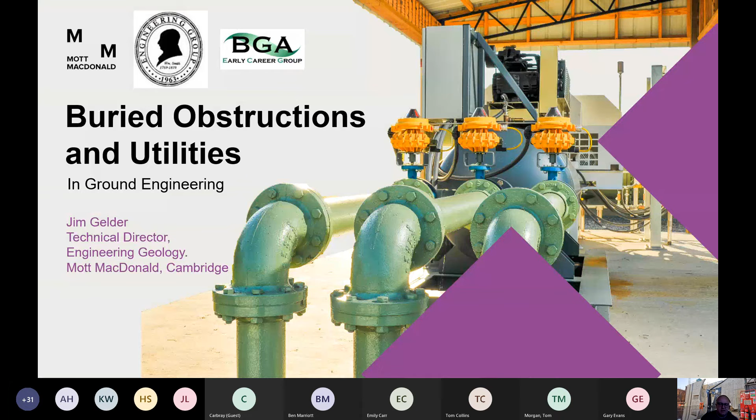Gary's already mentioned the Menti. It's really two questions. I would like you to think about the hazards associated with buried obstructions in the ground and the hazards associated with buried utilities. And there's one question around hazards and another question around mitigations.

I'm going to give a bit of context. I'm going to go through three case histories that will hopefully inspire and trigger thoughts in your brain around hazards and mitigations. But I don't believe I've got an exhaustive list, so I'm relying on a tremendous amount of insight from everybody on the call.

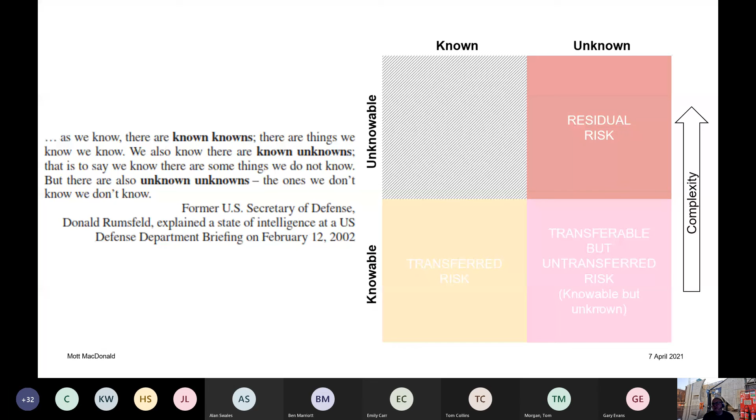The pink box is a box I'm quite passionate about, insofar as things that are knowable but unknown. The more effort you can put into moving things from that pink box to the yellow one, by investigation, by really tenacious literature search and searching for records, the better for everybody. The earlier you can develop as complete a picture as possible of what might be buried in the ground, whether it's demolished buildings, services, or whatever, the better for the project. And that's a real passion of mine.

So a quick look at what the Eurocode says. As with most things in the Eurocode, it says everything and nothing. Doesn't refer to buried obstructions or services specifically, but in planning the design investigation, it says that we should provide enough information for adequate design of the temporary works. And so if you've got to manage during construction with buried obstructions, buried foundations or whatever, then that fairly squarely falls into that category. We've got to provide the information required to plan the method of construction.

Same story, and we've got to be able to identify any difficulties that may arise during construction. All three of those squarely pointing towards our duty of care to have properly investigated and defined, as far as reasonably possible, things that are buried in the ground that aren't readily identifiable - known unknowns and unknowable unknowns. Design investigation shall identify in a reliable way the disposition and properties of all ground relevant to or affected by the proposed construction.

Imagine working in a water treatment works where there's a buried tank in the ground, an old partially demolished tank, and part of your new structure is going to be on it, part of it isn't. You really need to know as early as possible where it is so that you can design around it.

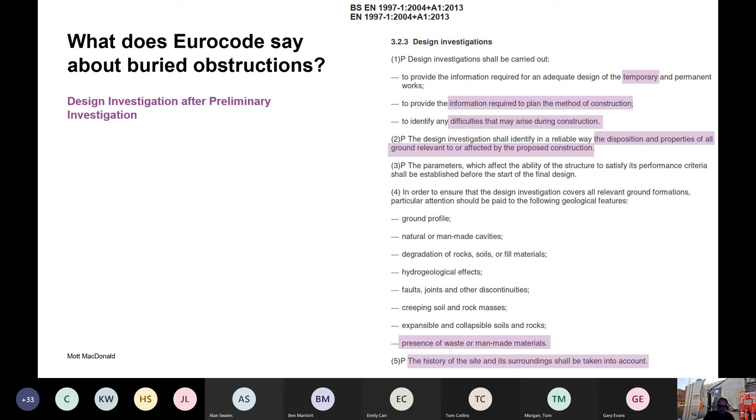It's always complex, but hopefully you'll get some clarity on some approaches we can take. For any site, as early as possible, you should consider the complexity and the amount of experience or precedent you've got for any aspect of the project - specifically, the complexity and precedent of the engineering, the complexity and precedent of working in a specific geology, and for buried obstructions, the complexity and experience precedent of working in the Anthropocene, that is man-made problems.

So the 3 case histories: 2 from Boston, 1 on the left bank of the quay, and I'll show you that in a second, 1 on the control room, and 1 from a waste water treatment works. For the left bank, our natural geology is relatively benign.

For a sheet pile wall, it's glacial till, for which there's plenty of experience and precedent as well. So down here, our geology is relatively benign, but we're interacting a new quay wall with an existing quay wall. That means the engineering is very complex.

And when I go through the site history, you'll see that the Anthropocene is also very complex in this red box. Really, we need to be doing as much as we can as early as possible in the project to allow the design concepts to fit around the dragons and monsters that may well be in the ground.

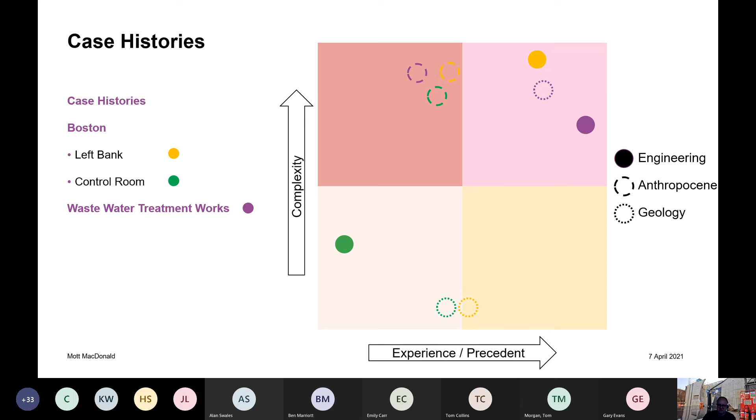This kind of classification I find really helpful to have discussions with peers, our design teams, contractors and early contractor involvement, and discussions with clients, to make sure that everybody's in the right space for how nasty it might get when you start digging holes where there's stuff that we don't really want to be there.

So back to the Eurocode. The definitions of the 3 geotechnical categories are helpful, but not exhaustive. They don't really deal with buried obstructions in any explicit way, and so those matrices that I've just presented, I think, are really helpful.

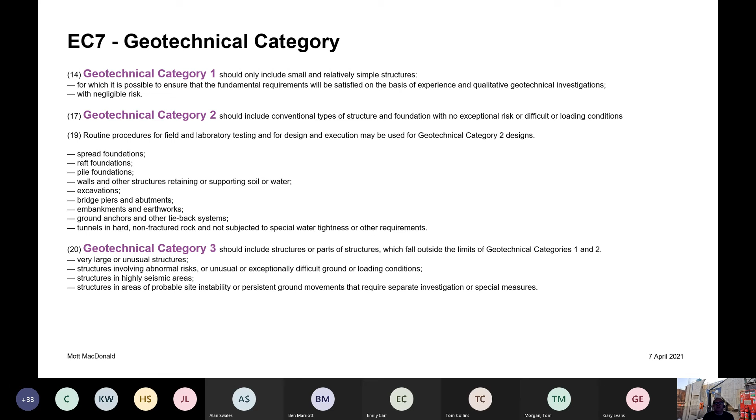You're never going to be in geotechnical category 1 if you've got congested utilities or buried obstructions. You will probably be in geotechnical category 2, but in certain circumstances you may involve abnormal risks, exceptionally or unusually difficult ground conditions, probable instability. So there are instances where I think buried obstructions could carry you into category 3, but the majority of the time you'll be in category 2.

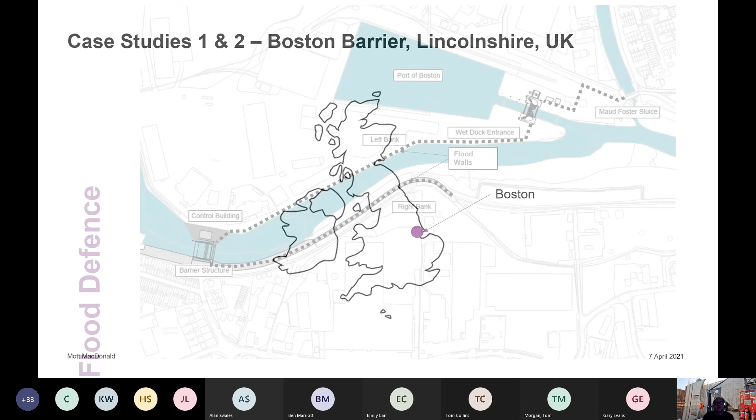Okay, so on to the case histories. Case histories 1 and 2, Boston. There's Boston in Lincolnshire on the Wash. A GA of the project - it's a flood defence scheme, so there's flood walls, new flood walls, sheet pile flood walls along the right bank of the river.

A new barrier structure - an enormous structure, a 365-ton steel gate operated by 2 55-ton hydraulic rams. Then a new flood wall along the left bank, all of which is in the estate of the Port of Boston, which is well over 100 years old and has a checkered history in its development. Another set of gates and a new entrance into the port, and flood walls seal into an existing flood defence at Maud Foster Sluice.

The geology is relatively benign in the natural ground. We've got glacial till and alluvium shown in yellow and green. The grey is made ground, typically 5 to 10 meters thick, very heterogeneous, locally contaminated, and as you'll see, made up of stacks of material from the historical development of the port.

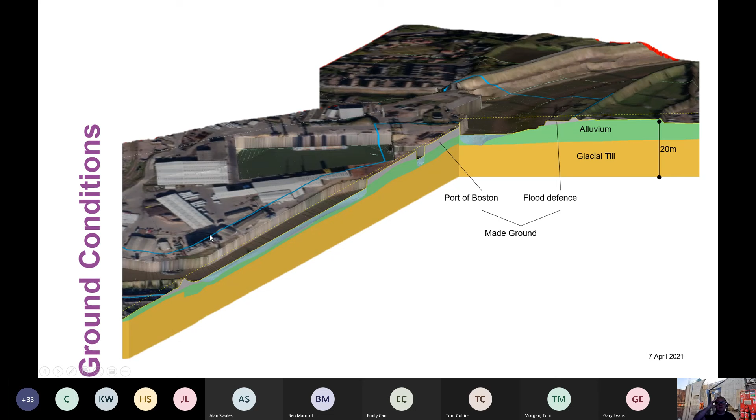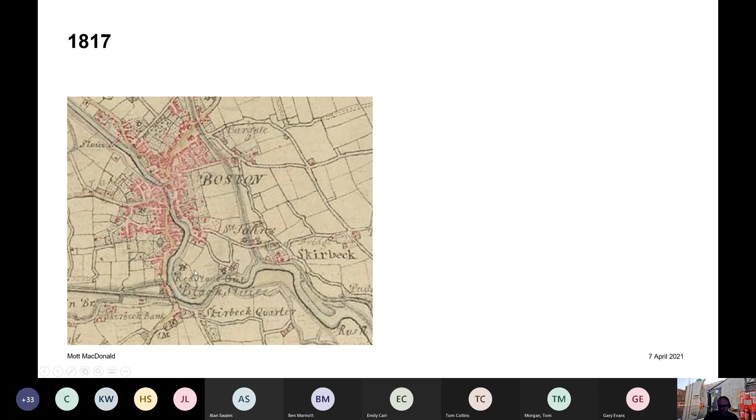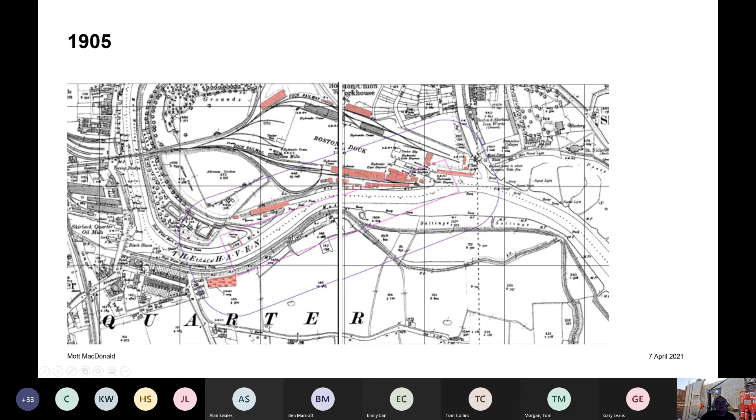By 1905, most of those buildings have either been developed further or demolished and replaced. There's a new ship slipway coming down. Those are the main developments by 1905.

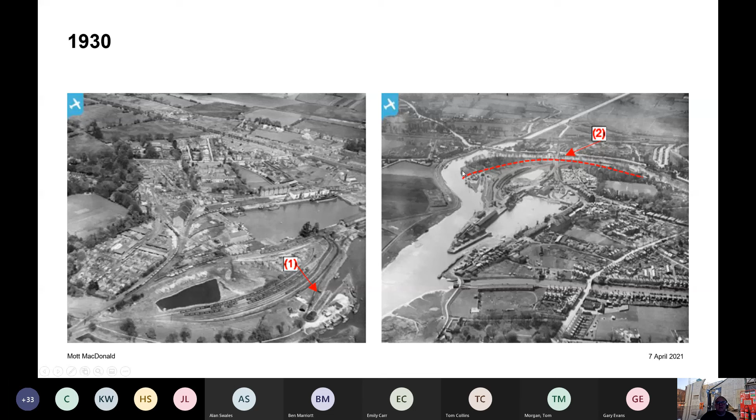Aerial photographs from 1930 show the slipway from the other side, and the dock and the railway. Our new wall is in this area here along the riverbank.

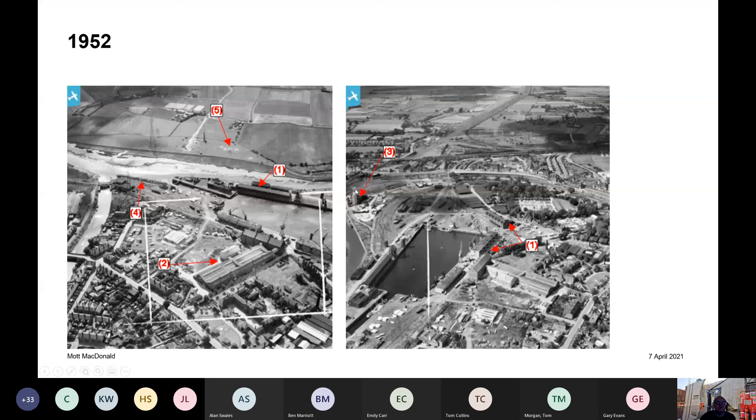By 1952, the left bank has been formalised with a concrete sheet pile quay wall, and this big sugar and grain silo has been constructed at that end. Things are getting really quite complicated.

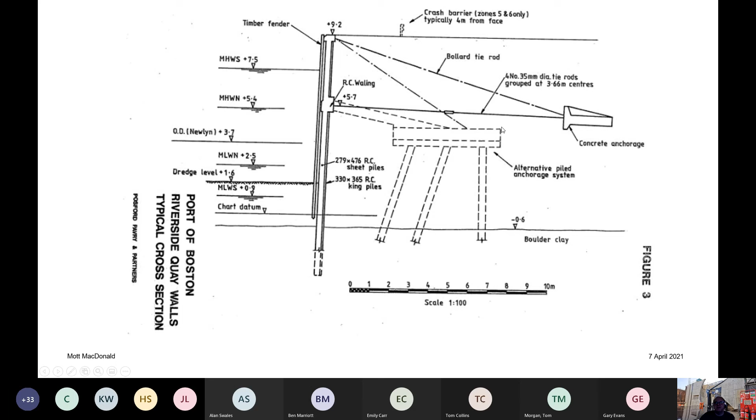From the engineering department at the Port of Boston, we have this standard detail showing a concrete anchorage, with anchor ties to a waling on the quay wall at the maximum bending moment, and bollard ties for the bollards intermittent along the top of the wall. There's also passing reference to an alternative piled anchorage system, shown dashed, with the anchor ties tying onto this piled anchor trestle table. What you haven't got is a dimension, so you don't know where this anchor beam sits, or where this piled trestle table sits.

Here's a potted composite history of all those historical maps, and we are building a new sheet pile wall in this area, along here, that will need an anchorage system somewhere back here.

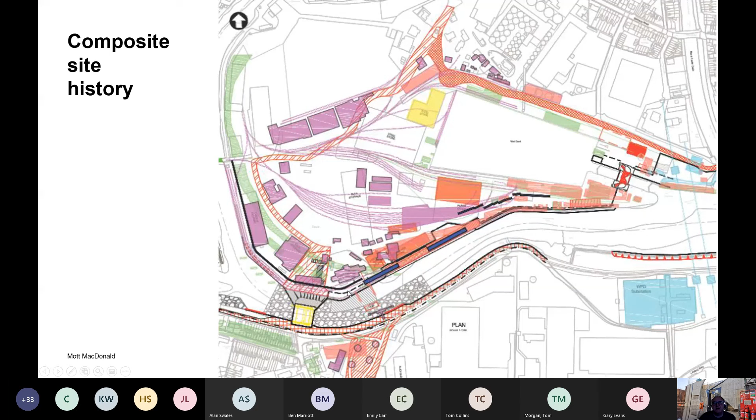Not long after the start of the design and construct, this black area here was found on a new drawing that was unearthed. That is the anchor beam, from this standard detail, and these blue patches are the trestle table anchorage of the existing quay wall. This was a real problem because the flood wall was proposed to be a sheet pile wall pretty much along this line, and obviously it's not possible to do a sheet pile wall through a big concrete anchor block, so we had to come up with a different plan.

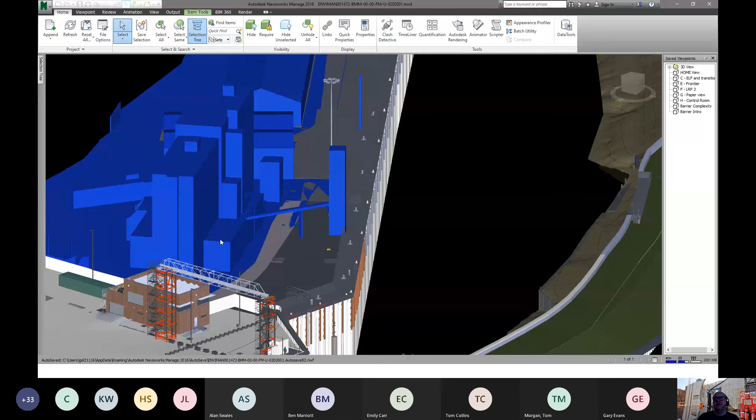So what I'm going to do now is dip into the BIM model of the job. Here's the river, right bank, left bank, and here's the barrier. This is the area we're going to be looking at, just in here, so you can see how some of this congestion manifests itself.

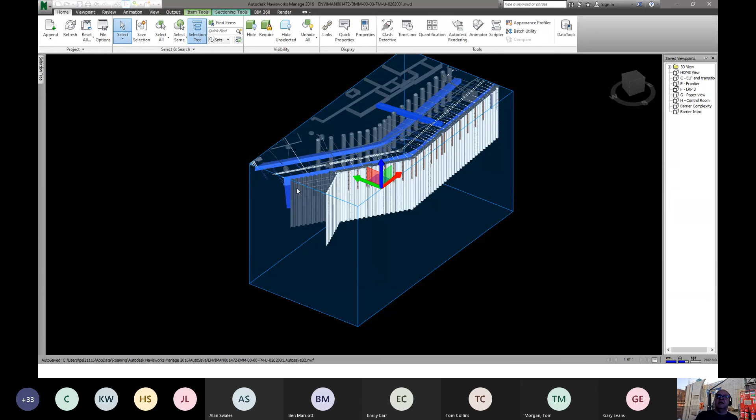If I now drop this down so you can see into the ground, you can see the anchor beam for the existing quay wall, and here's the existing quay wall. If I zoom in a bit, you can see the anchor ties and the bollard ties as well. We actually did a small trial excavation and unearthed this anchor beam in exactly the position the drawings suggested it would be.

This is a tunnel, a culvert from that grain silo to a crossing that used to take grain to the other side of the river. The original plan would be a sheet pile wall in this area to use as the anchorage for the new quay wall, which is here at the front.

The changes and the discovery of the drawing that helped us lay all this out meant that we had to change our idea for the anchorage, and instead we went for discrete tube pile deadman anchors. This had 4 or 5 specific advantages.

First, we were able to put the tubes either side of this culvert, and to the rear side of the anchor beam. We had a degree of X and Y flexibility in the position of the piles, which you wouldn't have with a continuous sheet pile wall. So if at any location a pile just wouldn't go into the ground, we could step it back a meter and try again. That meant we could pre-probe every pile position and drive the piles knowing we could get them in.

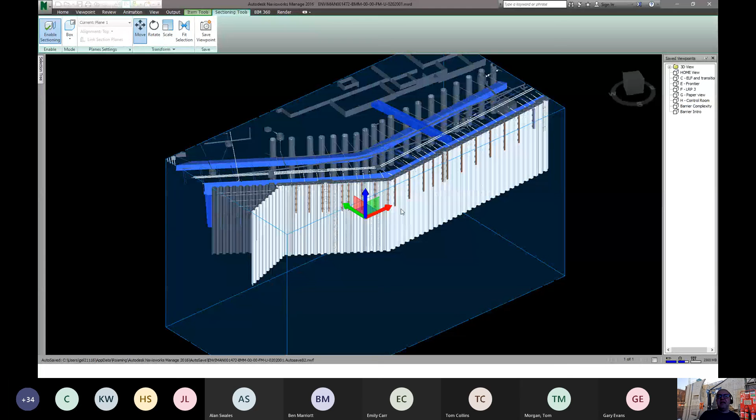The contractor drove a pair of sheet piles with a vibro hammer to prove clear driving at each location before the steel tubes went in. We could also use the steel tube as temporary shoring to allow man entry to connect the anchors into the tube, connecting at a high level so our anchors didn't clash with the anchor beam. Lots of advantages meant that the risk of clashing with these existing entities was able to be designed out.

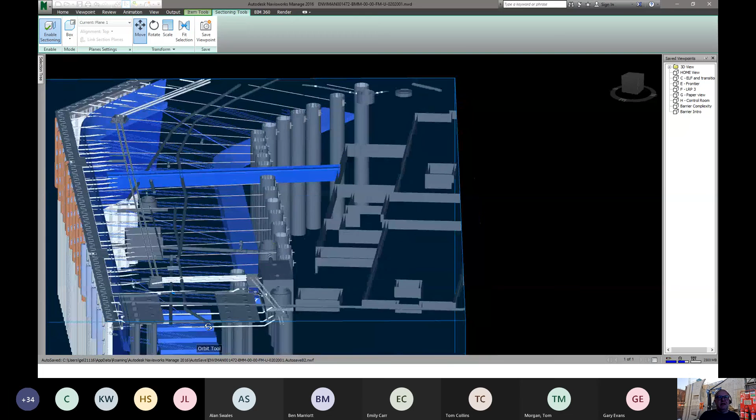If we go a little further along, here you can see the piled trestle table. Again, with the tube piles, we were able to design around that in plan and have the flexibility that we needed with respect to that.

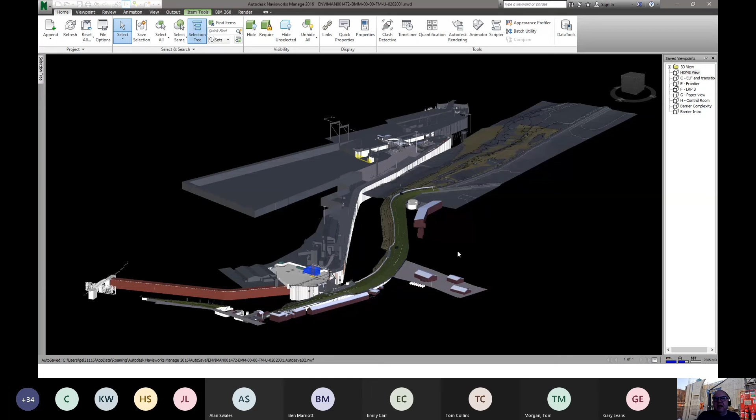Okay, while I'm in the model, I'm going to skip on to the next case history, which is for the control building, highlighted in blue there. We'll come in from the other side to start with.

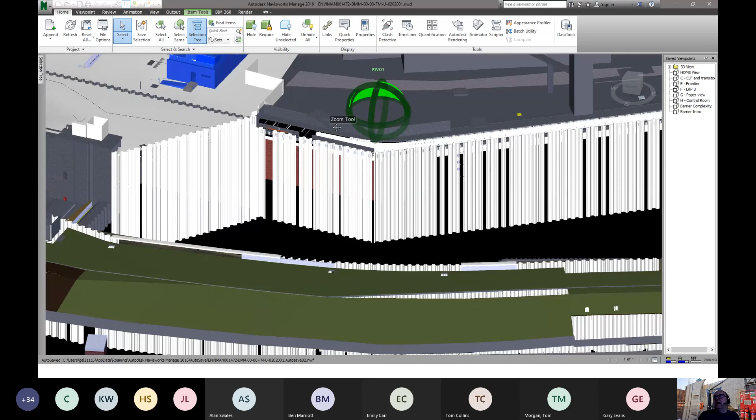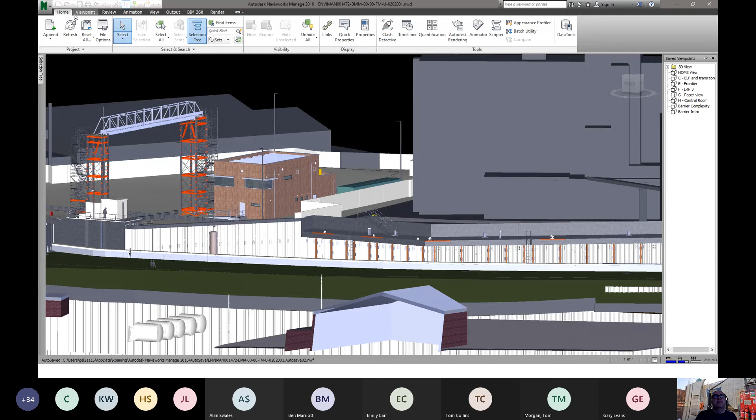So there's the control room. The control room houses the critical infrastructure required for raising the barrier, the power supply, the hydraulic pumps. All the critical plant is inside there.

Here's the flood wall. The control room is actually on the defended side of the flood wall, but there are individual pedestrian gates and things within it. There's still a possibility that water may get to the wrong side of the flood wall and potentially flood the control room. For that reason, within the works information, we were required to make the control room waterproof.

That meant bulkhead doors at ground level to be waterproof, which were small and narrow and really constrained the M&E plant we could get inside and how easy it would be to service. We needed a standby generator, which would have needed to be on the other side of those bulkhead doors, which was a real problem, needing exhausting and refueling from above the flood defence - also a big problem.

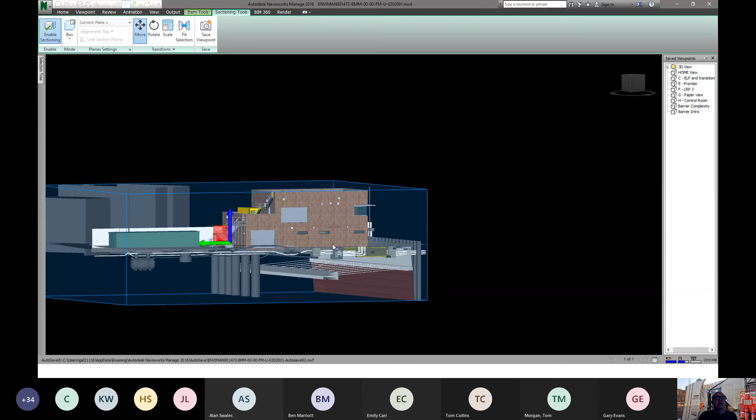So the solution was relatively straightforward: you move all the critical infrastructure. Also, in a flood condition the building would become buoyant, so you needed hold-down piles to stop it floating away. The solution - put the critical infrastructure upstairs - and all those problems go away.

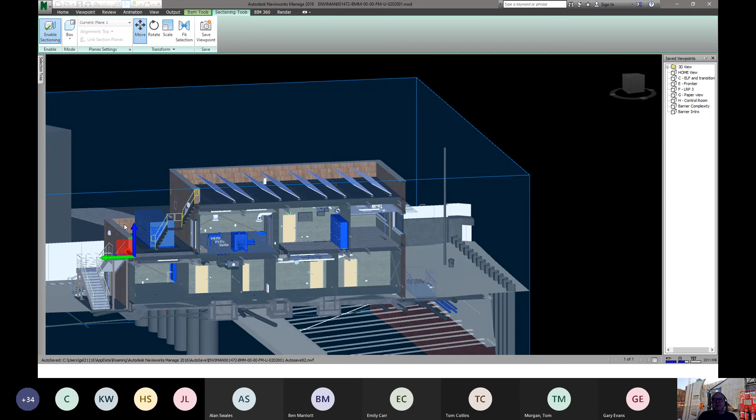These are the MCC kiosks for the electrical. Here's the hydraulic oil supply, and the hydraulic pumps are in here. Here's the generator, which is now easy to refuel and exhaust outside on a platform. All those design changes inside the building meant we were able to consider the possibility of not using piles.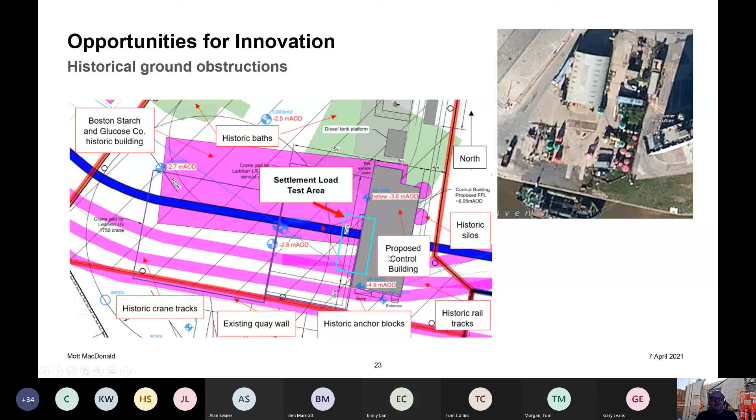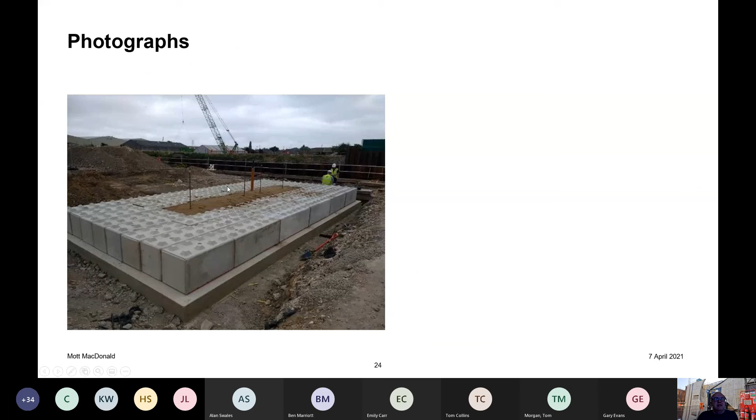So we took the opportunity to do a settlement load test. We cast a small raft foundation, built up Kentledge using Legato blocks and sand on three levels, and installed a bunch of monitoring in there. We were able to demonstrate through that monitoring that we could in fact use a raft foundation - that although there was a reasonable thickness of made ground, it was predominantly granular, and settlements would be immediate with no long-term risk of consolidation or creep.

A view underneath of what it would look like - horror, 70 steel tube piles, clashing all over the place with anchor beams, anchor ties, existing utilities. Significant health and safety risks were reduced, associated with piling through those buried obstructions, diverting buried services, and excavations required to exhume potentially contaminated bits of buried infrastructure.

All the clashes designed out and the unknown buried risk reduced significantly in terms of finance. There's obviously the capex saving from the piles and the piling, but also the risk of delay, critical delay.

The control room, not surprisingly, is on the critical path for commissioning the barrier.

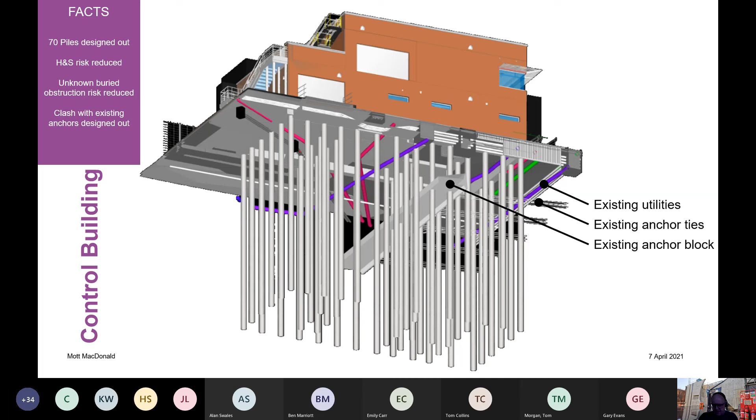On to the third case study. This is a wastewater treatment works. It's just a ground investigation. Just a ground investigation - who knows? It's still quite easy to kill someone in a site investigation.

We were doing boreholes. We'd done a services search and got services drawings. We'd laid the boreholes out around those services to avoid them. We'd had consultation with the ops team for anything that they knew from local knowledge. We'd done PAS 182 GPR clearance of the site. We'd done a surface CAT scan. We'd done a hand dug inspection pit, and we'd CAT scan the bottom of the inspection pit. What could possibly go wrong?

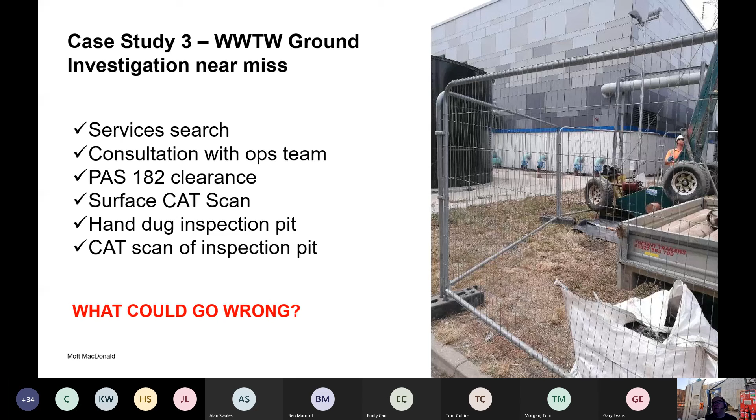The problem was that this was a change. This was borehole 1A - I don't know whether it was borehole 1A, but we'd had to terminate a previous borehole, and we'd changed positions and we'd offset. There was perhaps elements of groupthink, that this was about the 10th A, B, or C borehole that we'd done where we'd have to offset.

We went through a degree of process blindness. We'd gone through all the checks that I've just said and not detected anything. The problem was that there was a polyethylene pipe carrying raw sewage sludge from this wheel here to these pipes over there. And the thing that saved us was the experience, expertise, and competence of the driller, who immediately recognised the behaviour of his drilling rods was wrong, stopped work immediately, and that's why we had a near miss and not a very messy and smelly accident.

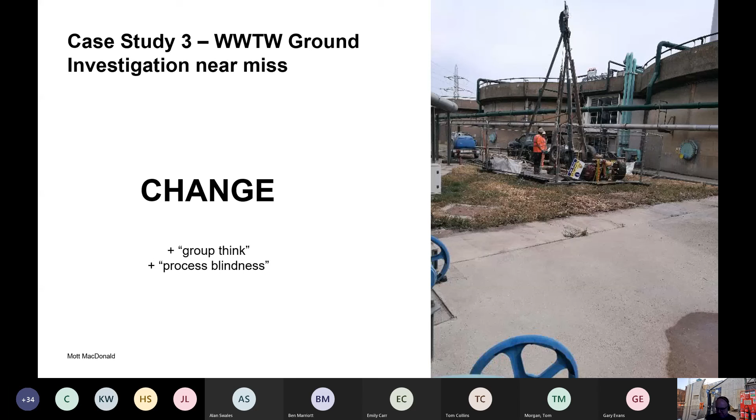Here's a challenge. If we struggled to sink a borehole there, how is anyone going to build a piled foundation there? If you think those models that I just showed you at Boston were complex in the ground, it's going to be absolutely horrific for anyone that's got to build a new building in that area, and how you fairly and squarely share the risk between the client and the supplier for that risk is really challenging.

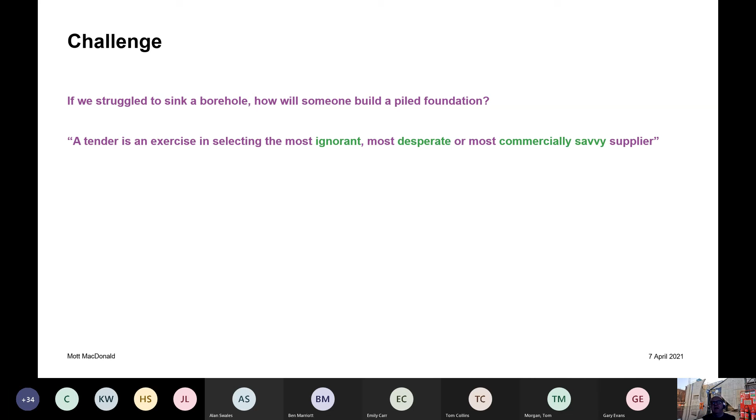And that leads me to this statement that came from a very wise, but will remain anonymous, friend of mine. He says, a tender is an exercise in selecting the most ignorant, most desperate, or most commercially savvy supplier. And none of those things are good for a client, and certainly ignorant or desperate are not good for health and safety.

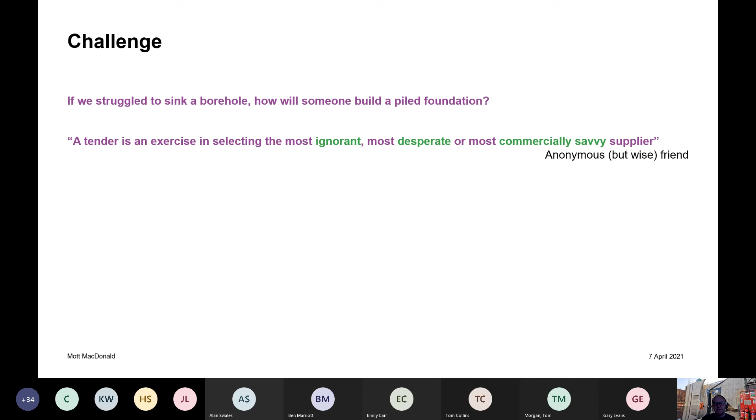So really a baseline of what is or might be - known unknowns, or good imagination of unknowable unknowns, what might be in the ground - built upon as complete a picture as possible, as early as possible in the project, is the best way to design out hazards, and designing them out is the best way to reduce risk. You do that early, and you apportion risk equitably so that everybody is working in the right environment, atmosphere, space to manage the ground risk appropriately.

So mitigations, avoidance - I've given you some case histories now to hopefully help you understand the importance of concept design. Not saying, oh, it's just concept design. If it's concept design, that's when you've got the most opportunity to design out through avoidance of ground risk and utility risk.

Of course, you need procedures, risk assessment and method statements, toolbox talks. Brief back is really helpful - so when you give a toolbox talk, you ask the operatives to brief back to you what you've said. A permit to dig system that's signed off before anyone digs in the ground. And if things change, then you stop and replan.

Competence is important. You need experienced people with expertise and accreditations, CPCS cards and the like. But behaviours is probably the most important part of competence. So it's no good having poor quality RAMs and half-hearted toolbox talks and permits to dig signed off as part of a grudging approach to paperwork.

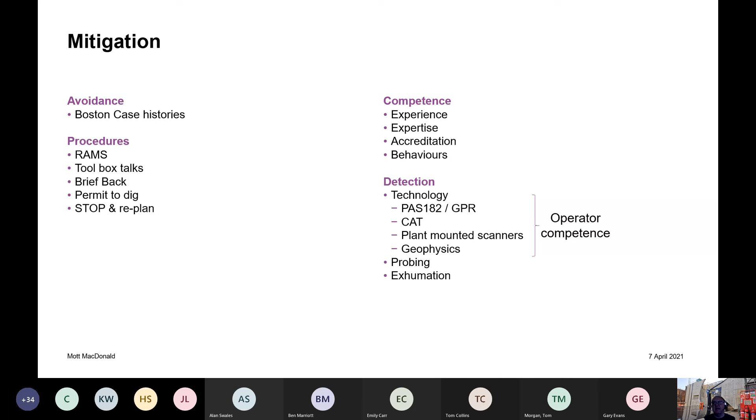I mentioned at Boston we did probing, and that was very successful. We also dug down and exhumed the anchor block, and those are opportunities available to you. But exhumation in particular - as soon as you start excavating in this ground, even trial pits, where you've got congested utilities, it gets really, really challenging.

So my conclusions: get the concept right, understand complexity and the amount of experience and precedent available for a site that's got buried obstructions and congested utilities. Know your known unknowns and investigate them in as much detail as you can. This would have meant finding the anchor block at Boston a lot earlier than we actually did, for example. Do that as thoroughly and as early as possible.

Literature search, record search. You need real tenacity in a desk study in this type of environment. Never accept, oh, these are all the records we've got because we've lost them. Go to the public records office in Kew if you have to. Really challenge again on as-built drawings and available drawings. Go to the GEOLSOC library or the ICE library, get literature searches done by librarians. It's amazing what you can find in published papers.

Detection by technology, probing and exhumation - really important. Know how you'll build the works, including how you'll manage unknowable unknowns, and if possible do that at the concept stage. Get contractors involved early so that part of CDM, where you provide the information to build the work safely, is covered off, and you can plan your investigations around that. Or you can say, well, we'll mitigate it at the construction stage, but understand what that means in terms of risk for buildability and design.

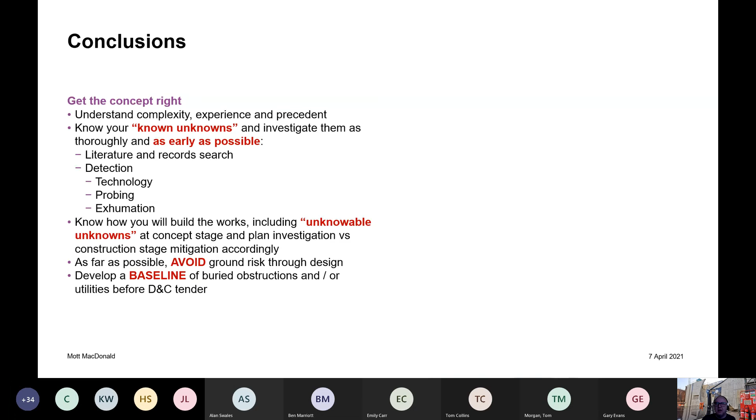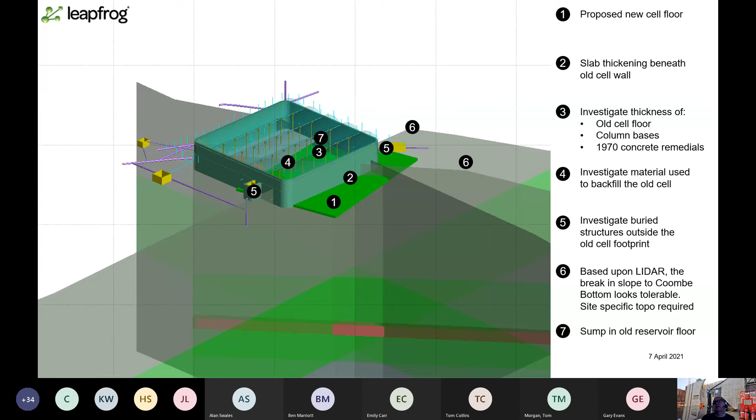Here's an example of what this might look like. Here's a model of an old demolished surface reservoir with columns that used to support the roof, a base slab and walls, and excavations for pipe work and what have you. This green slab is a proposed new foundation that goes in next to it. You can see at a glance all the clashes that are going to be encountered and what needs to be considered in terms of dealing with these buried obstructions before we put the new foundation in. That's what I mean by investigating early, thinking through the buildability and sharing risk equitably.

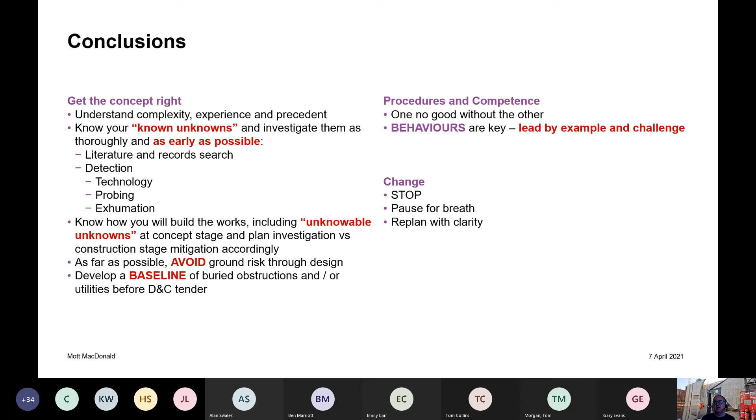Back to the conclusions: procedures and competence - one's no good without the other. Competence is important, but it's those behaviours, those attitudes and that tone that comes from the professionals on site. So lead by example and challenge. And when you get change, stop, pause for breath. Don't plow on - replan, but replan with clarity. Make sure you take a step back, zoom out, and reassess what might be there, not just what is thrown up through your process. So that's around about it.

I'm done. We can open for questions, Gary, now, or should we have a look at the Mentimeter? I appreciate I've run over a little bit. Right, hazards, how do you control Mentimeter?

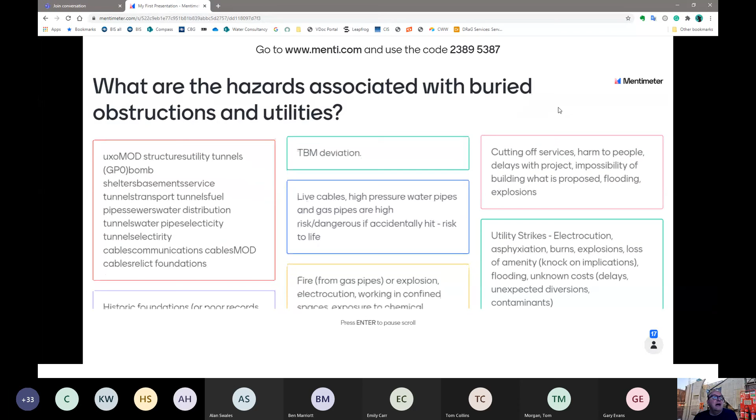It's crazy - historic foundations, damaging pre-existing measures, fire, explosions, contamination, UXO, Japanese knotweed, cavities, mine workings, all fantastic stuff. Unexpected utilities, health and safety, cutting off services and harm to people, brilliant. More utility strikes - basements, tunnels, pipes, sewers, cables, MOD, fantastic stuff.

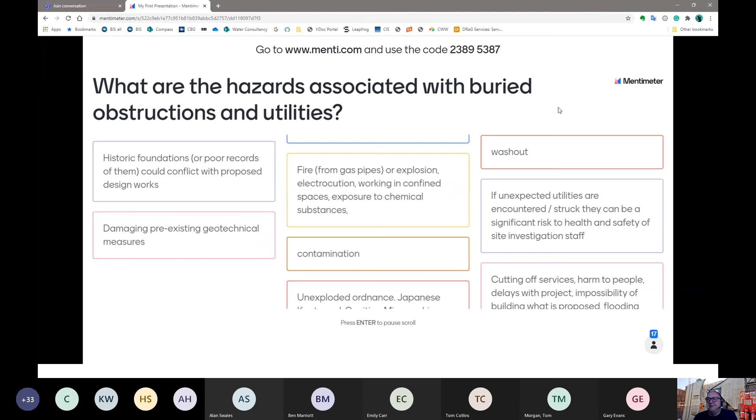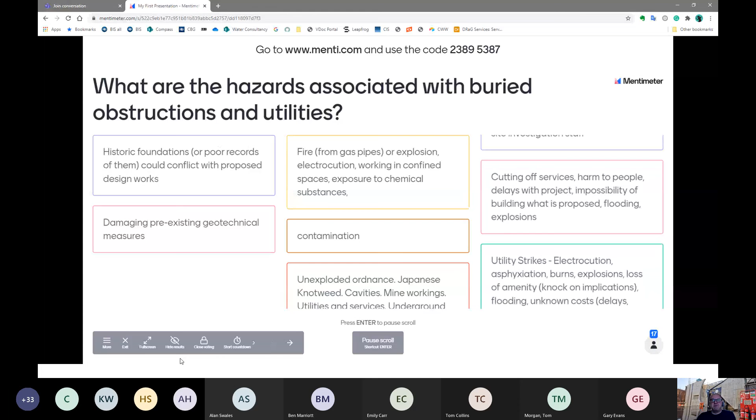I don't know. I'm a bit of a novice with this, I do apologise. All sorts of fantastic things in there.

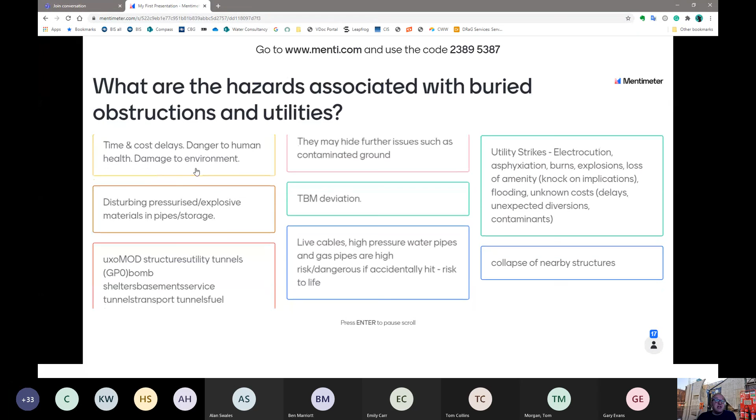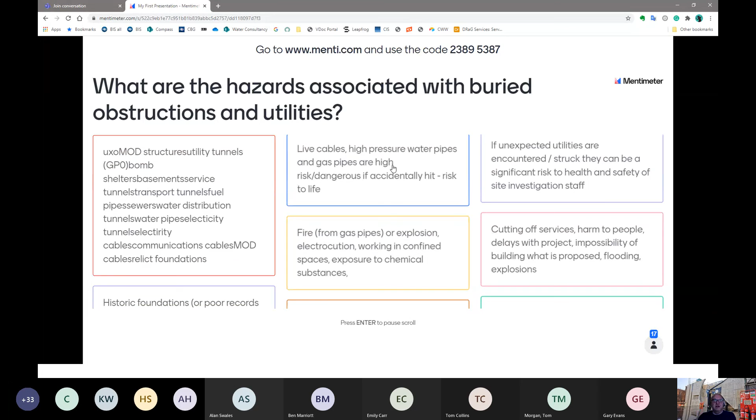So I'd say time and cost delays - I've talked about that quite a lot. Danger to human health, damage to the environment - I didn't pick up on that, that's a really good one. Tunnel, TBM deviation, all sorts of good stuff in here.

I will find a way during Alejandro's talk to better consolidate these and have a look. How do I get onto the next slide? There we go, mitigations.

Don't think I've got any mitigations. Bit of a shame. I'll do a little bit of digging round on mitigations during Alejandro's talk, and if there's anything - oh, proper desk study.

Yes, please, I use the word tenacious. I don't think we're anywhere near tenacious enough for desk studies a lot of the time, and I don't think very often we appreciate how much we can do with desk study experience and expertise, with old heads and contractors very early in a project to shape it. The key question is always going to be: if we've got these hazards in the ground, should those hazards shape the project? Should we change the project to avoid the risk in the ground, or is the project so constrained that we've got no alternative but to accept? Designing out is always the best way.

Cool, I'm going to stop sharing - should we take some questions, or is Alejandro ready? Jim, Alejandro's ready, so if we can move on to his presentation and save the questions for the end, that'd be much appreciated. Thanks for stepping in. No worries at all, cheers.

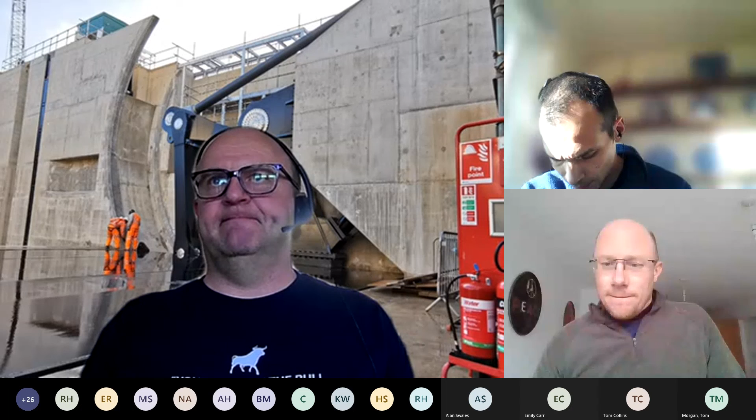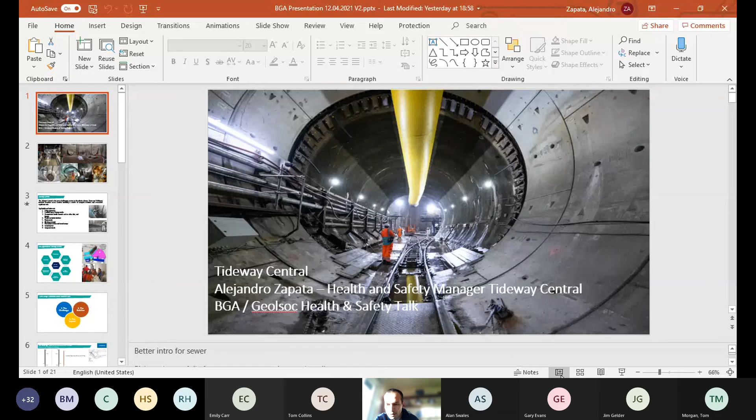Are you ready, Alejandro? Yes, I am. Excellent, thank you. Everyone see the presentation? Yeah, that's fine. Okay, if the internet is not working properly, please put that on the chat and I'll try to stop. Hopefully it's going to be working properly. Apologies for being late, guys. I'm Alejandro, Health and Safety Manager at Tideway Central.

Today I'm just going to share with you a brief introduction about Tideway, the health and safety strategy that we've implemented in Tideway Central. I will explain three case studies - hopefully they're going to be relevant to you guys, geologists - and I will conclude with some examples of what to expect on a construction site.

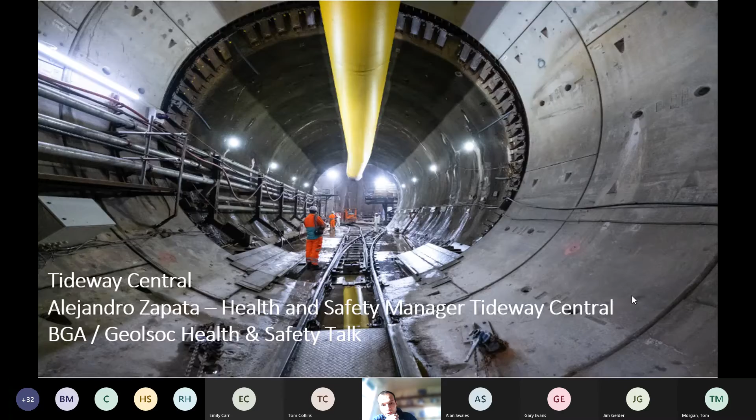So as you're aware, Tideway is a project improving the sewage system in London. We're building a 25 kilometer tunnel with a 7.2 meter internal diameter, and its main purpose is to capture all the sewage water currently being discharged into the river. Why? Because the current sewage system in London was built in the 19th century, when there were 1 million people living there, and Joseph Bazalgette built this sewage system for 3 million. However, there are now about 9 million people living in London. So when it rains, the system doesn't cope with the capacity, and there is overflow water discharged into the river. The purpose of Tideway is basically reducing the sewage discharge and hopefully having a less polluted river.

There are 3 different sections in the Tideway scheme. I'm currently working in the central section, where there are 2 companies: Laing and Ferrovial Construction. As part of Tideway Central, we have 9 different work site locations across London and the heart of London, like Victoria, which is next to Embankment Station, or Blackfriars, and so on.

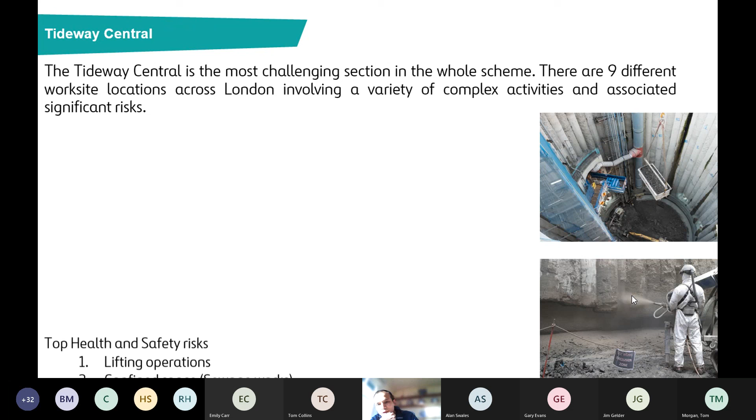There is, as you can imagine, a variety of health and safety risks and hazards, because of the complexity of activities we carry out in this project, like marine operations, tunneling, civil works, working in sewage, etc. This makes the project complex and challenging, but also makes it quite exciting to work in.

I'm just listing the main health and safety risks that we have to deal with on a day-to-day basis. We review the top risks for the sites on a monthly basis, based on the activities we're undertaking in that period, and we try to make sure to have the right and adequate controls in place to manage those top risks.

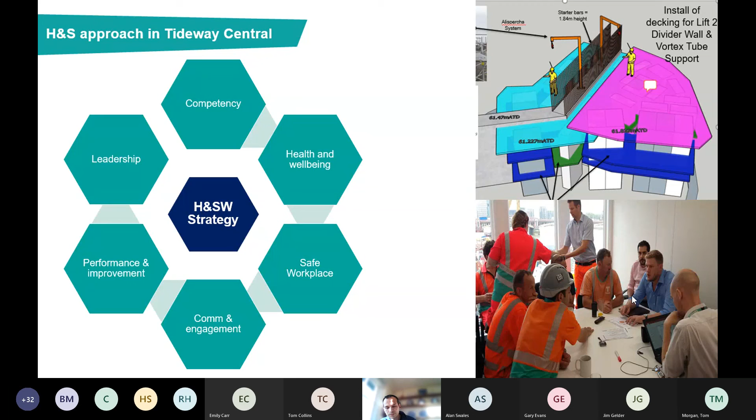So now, guys, hopefully these case studies are going to be interesting. The first case study was some excavation challenges we faced during the excavation of the shaft at Blackfriars.

During the excavation of the drop shaft at Blackfriars site, we encountered a significant challenge during the last 5 meters. This was a 51 meter depth shaft, and there was a potential for the base of the shaft to fail if the dewatering system had failed. It was a significant challenge, but with good planning and design out of the risk, we could deal with the situation effectively.

There was an independent review carried out by a team of geologists and different experts, where they qualitatively considered different mechanisms of the base failure in the shaft at Blackfriars. One of the hypotheses...

Can you hear me, guys? Yeah, it's fine. Yeah, okay.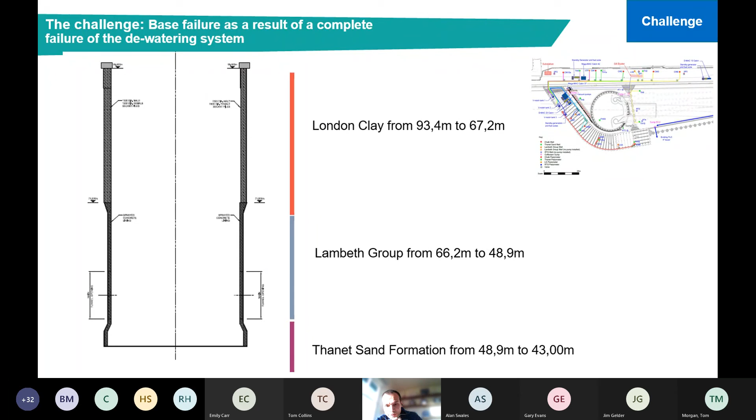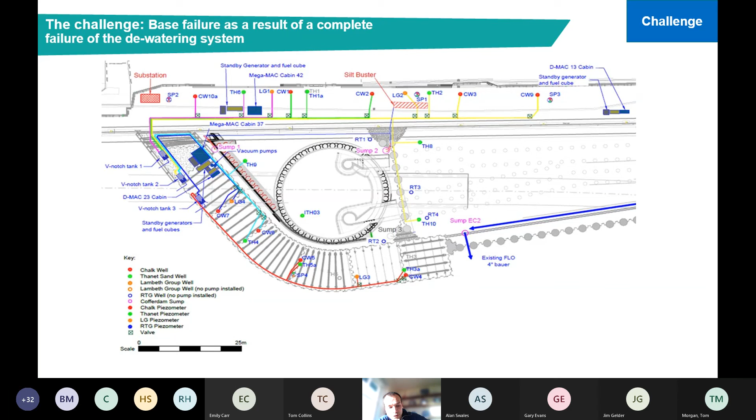This is the dewatering system that we actually have at the moment, the present time in Blackfriars. As I said, there was a dewatering system in and around the shaft to manage these forces in case that there was a failure of the base of the shaft in the tunnel.

So the possible negative consequences that were considered was that there was a possibility of soil disturbance directly below the shaft, and this may have extended a limited distance outside the footprint of the shaft, potentially affecting nearby buildings. The geologists estimated that between 1 and 2 meters of excavated material could have raised above the shaft level. There was also a probability, as you can see in the pictures, of displacement of the section of the tunnel immediately adjacent to the shaft.

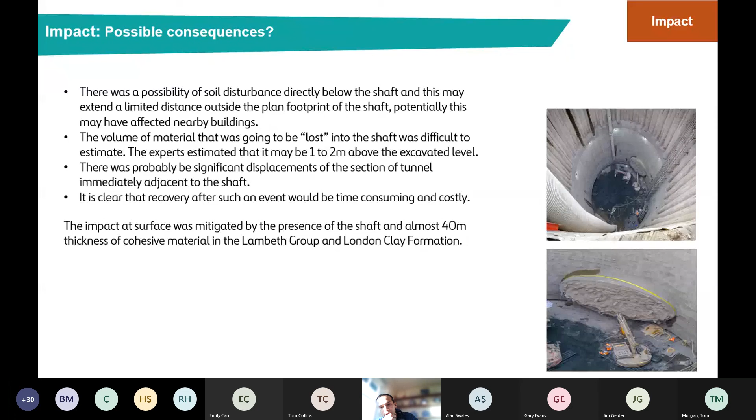And also, as you can imagine, if this would have happened at Blackfriars, the consequences also would have been very costly and time consuming. We were told during a review by the experts that we only had 2 hours and 35 minutes to implement a system if the dewatering system would have failed.

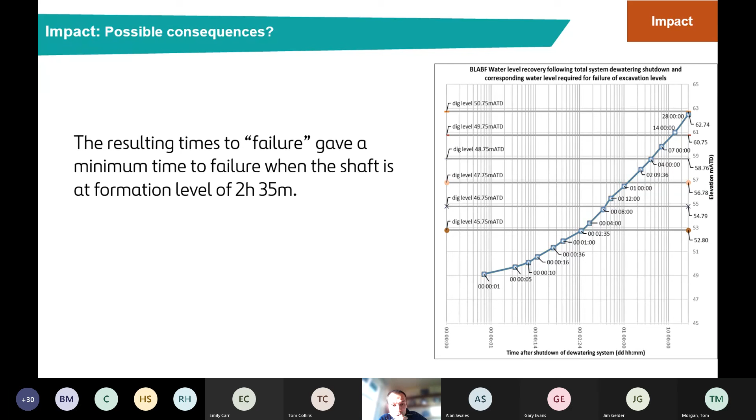So we implemented based on that information and advice from this multidisciplinary team, an action plan. This diagram here just briefly shows what we implemented. So we have a main power supplying power to the dewatering system.

If this main power would have failed, then we have a backup generator, and automatically there was a text message sent to the management team and to WJ, the company managing the dewatering on site. Then if the backup generator and the main power would have failed, then we have another alternative solution to prevent that disaster occurring in the shaft at Blackfriars.

So we installed an audible and a visual alarm on the shaft just to evacuate the people on site, and also we have some pumps to bring water directly from the River Thames to increase the restoring forces by filling the shaft with water.

Luckily, we didn't have to get to this line. We already finished the excavation of the shaft at Blackfriars. We installed the base slab, which is 4 meters high, and thanks to the contingency plan and the planning that was put onto this work, we dealt with the situation in an effective way.

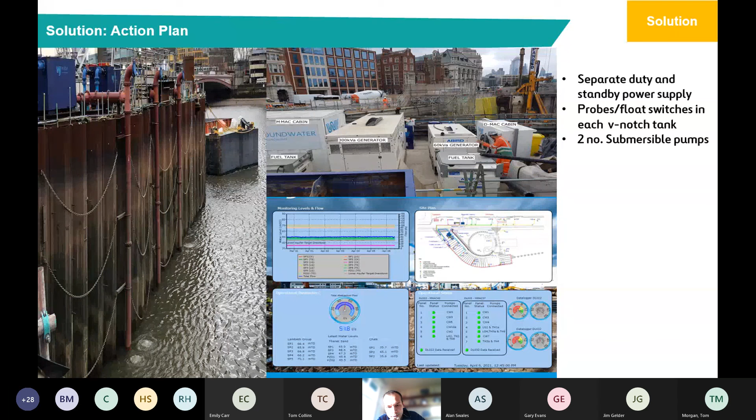These are just some examples of the dewatering system and the live monitoring system online that the engineers were checking on a daily basis to ensure that the dewatering was working properly.

The second case study was the presence of hypoxic ground. So in Tideway Central, during the excavation of the shaft at various sites and during the excavation of the main tunnel, there was a probability of encountering hypoxic ground.

According to the geologists in the project, this hypoxic ground was a result of years of historical dewatering in the London Basin, resulting in a significant cone of depression in the lower aquifer, which in turn drained the strata above it, the Thanet Sand Formation and the Upnor Formation. I believe this left air pockets in the sand and gravel of the Upnor, which reacted with oxygen to produce nitrogen-rich gas.

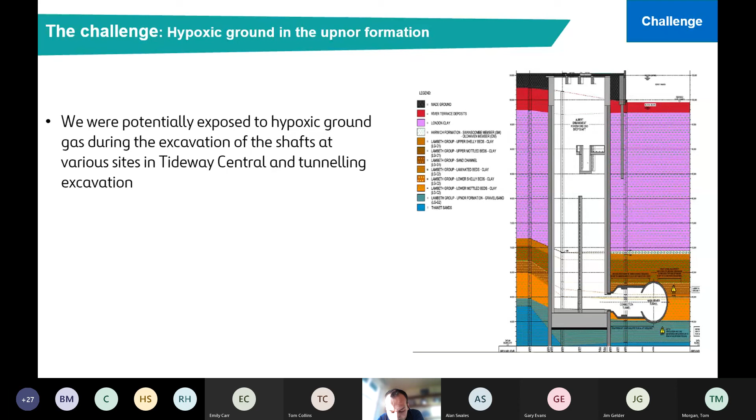From a health and safety perspective, and putting this in simple words for us, this means that there was a risk of a deoxygenated ground in the shaft that potentially was going to deplete the oxygen in the atmosphere.

So usually in Tideway Central, for the construction of the shaft and the tunnels, we work under the British Standard BS 6164, and based on these standards we get all the guidelines and the main controls that we have to implement during the construction of the shaft and the tunnel.

So the implications of encountering hypoxic ground were quite negative, and potentially they could have resulted in neurological disorders, headaches, dizziness, and potentially fatalities. So usually we needed to keep the oxygen levels between 19.5 and 23.5 percent.

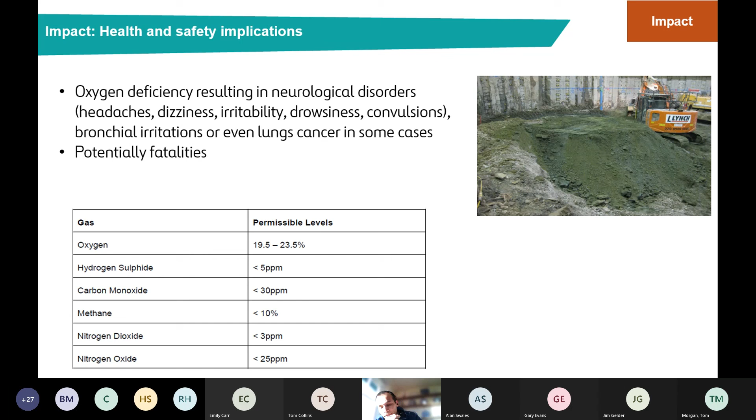We install live monitoring gas monitors at the pit bottom. I think we have a Trolex system, and it's a system that is connected at pit bottom, and then at the top we have a screen where we can see the live readings of different types of gases like hydrogen sulfide, carbon monoxide, oxygen, etc.

Also, when we reach the level of the shaft where there was a possibility of encountering hypoxic ground, we ask everyone working in the shaft to carry portable gas monitors. We provide training and toolbox talks to the people working in the shaft, as well as to anyone visiting these areas.

This picture, where the Lynch excavator is, was shared with us to give the workforce an understanding of how the ground, like the color of the ground, was going to be during the excavation where there was a possibility of encountering hypoxic ground. It's like a kind of a greenish ground.

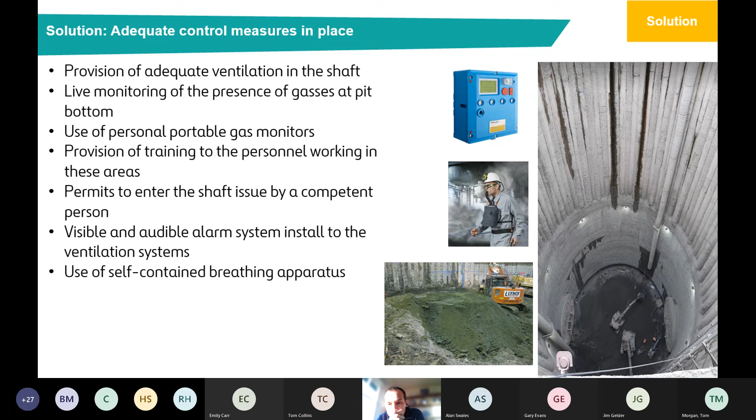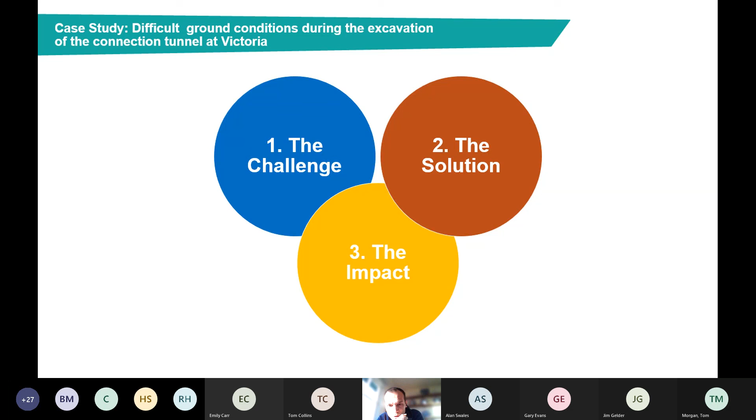The last case study is in relation to some difficulties we faced during the excavation of the connection tunnel at Victoria. This is a site near Embankment station. As you can see in the picture, that's the shaft that was approximately 49 meters depth. Towards the right, we built the connection tunnel that was connected to the main tunnel running under the River Thames.

So what was the difficulty here? We had difficulties because the shotcrete was not adhering to the sand. As you can see at the yellow section, we were excavating and there was a sand channel, so the ground was very unstable. For the shotcrete to adhere to the sand, it was quite difficult.

In the project, we do some multidisciplinary site meetings that we call required excavation and support sheets, where the sequence of the excavation is discussed and the methods to apply. Toolbox talks based on the ground conditions and the ground profile are discussed as well.

So in our case, we were advised to install 3 meters of forepoling boards or sheet piles and follow an excavation every 1 meter. So these 4 sheet piles over 3 meters long, and we have to excavate 1 meter and shotcrete based on - you can see an example at the top showing the colors in the phases of the excavation. That's an example of the sequence of excavation we have to follow.

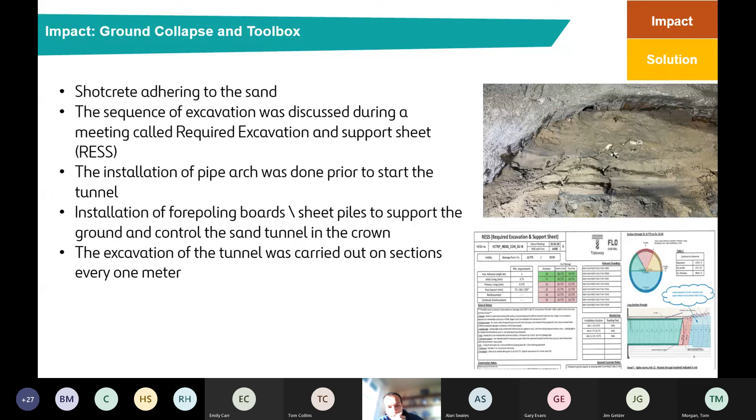I think this is the last section of the presentation. I put some pictures of examples of some incidents that I have experienced in the project.

First example - I never thought that I was going to experience a fire on a construction site. It's very unlikely to have a fire on a construction site. Usually the probability is very, very low. Even the London Fire Brigade, when they were on site, said to us that that's very unlikely.

But anyway, it happened. We had a compressor that was housed in a metal container, and we believe that one of the lithium batteries that we use for power hand tools was the cause of the fire. The fire didn't spread to other locations because it was actually contained in the metal container. So it was a localized fire - it didn't spread anywhere else.

But as you can imagine, the consequences and the time investigating accidents, property damage, there is some cost involved in these accidents. So I think you can see some bullet points of the reality in a construction site from health safety, from me as a health safety manager in Tideway.

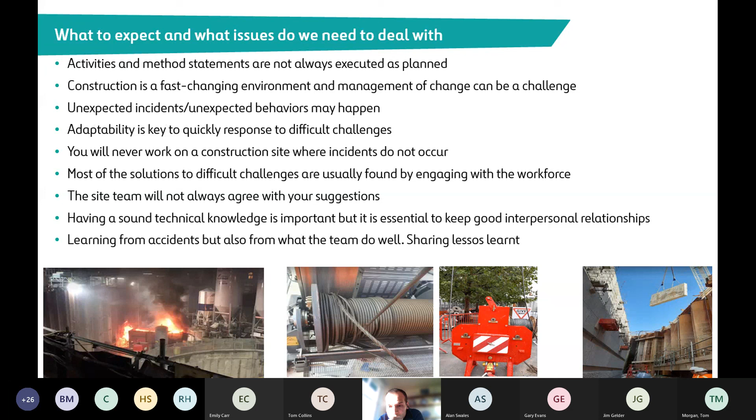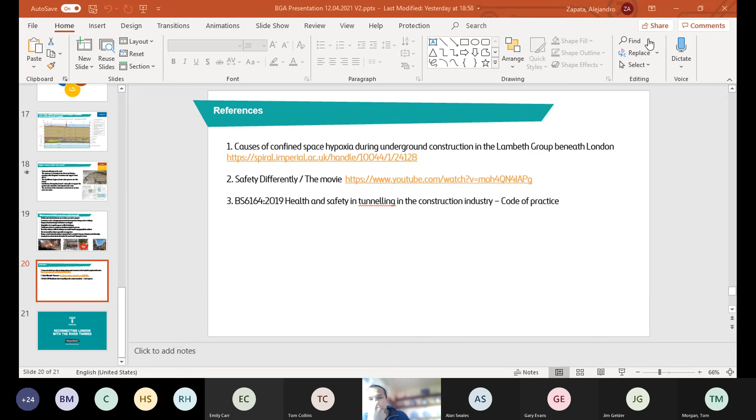Thank you, Alejandro, and thank you, Jim. Some really interesting points have been brought up today, especially the importance of teamwork between multidisciplinary teams on site on projects. Obviously, the importance of planning and visualizing hazards and risks is quite an important thing that's becoming more and more the norm. So we'd like to invite the audience to ask the speaker questions. Has anybody got any questions?

Okay, I'll ask one then. So, Jim, where would you like to see the industry going in the next few years with buried services? What would you like to do that you can't do at the moment?

I think the thing that I don't like is this notion that you can transfer ground risk to the contractor and that you can kick the can down the road. As the complex gets bigger and more complicated, that picture becomes bigger and more complicated.